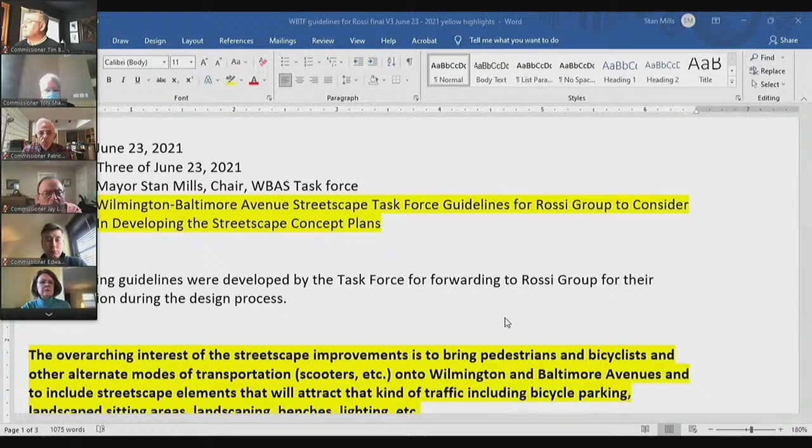That yields 16 members. As I mentioned, one of the overall main objectives of the task force is to provide recommendations. So I wanted to share with you some of this real quick before we hand it over to Rossi. This is a support document embedded into the agenda, so I'm not going to go through it all, but I would like to highlight some of the main things.

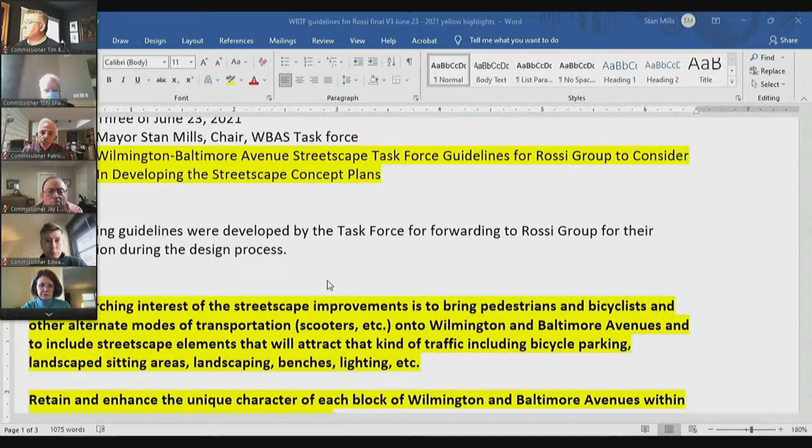These are the guidelines developed by the task force that were then passed on to Rossi to use as their foundation for creating the concept designs. I'd like to read some of the highlights here. The overarching interest of the streetscape improvements is to bring pedestrians, bicyclists, and other alternative modes of transportation, such as scooters, onto Wilmington and Baltimore avenues, and to include streetscape elements that will attract that kind of traffic, including bicycle parking, landscape sitting areas, landscaping, benches, lighting, etc.

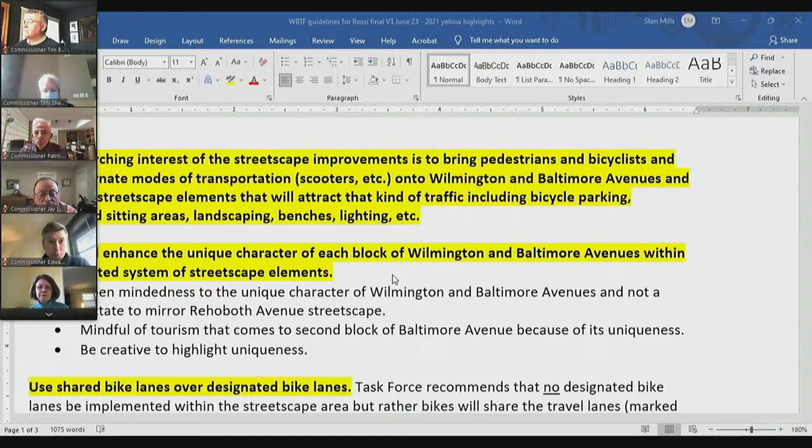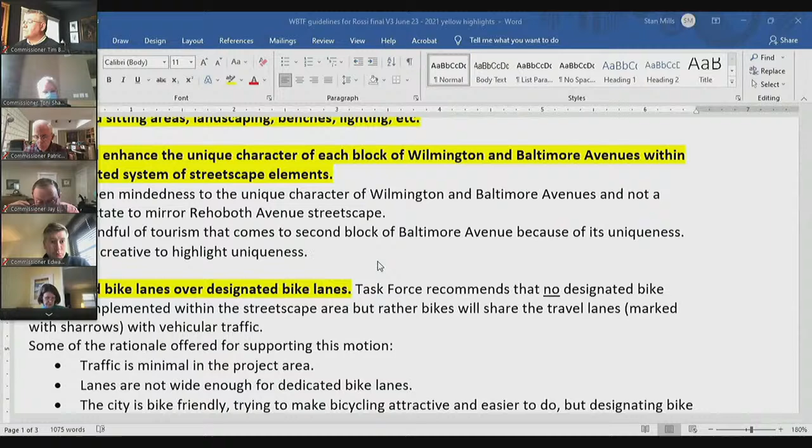As Sharon and I have both mentioned, the amenities come later, so it's going to be absent today, but it is in the guide for the future phase. Some of the other guidelines: retain and enhance the unique character of each block of Wilmington and Baltimore avenues within a coordinated system of streetscape. The task force said that it doesn't have to match the character exactly of the streetscape on Rehoboth Avenue, but there can be some uniqueness there.

Use shared bike lanes over designated bike lanes. Minimum traffic lane width should be established and standardized. We suggested a 10-foot minimum, but 11 or 12 feet are also feasible.

Consider maintaining tapered travel lanes in the first block of Wilmington and Baltimore avenues. For those that aren't aware, if you stand on First Street and look toward the ocean on Wilmington or Baltimore, the street is actually flared, and it is wider at the ocean end than it is at the narrow end. I don't know the real genesis of it, but this is often done to give you a better view down the street and avoid tunnel vision, so to speak.

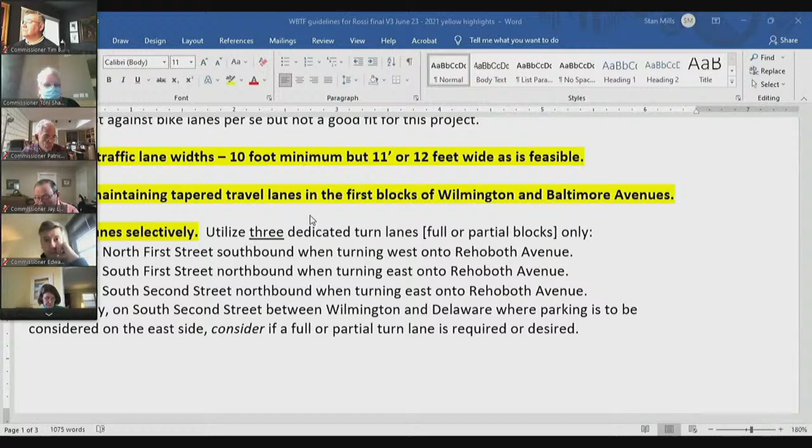There's also a benefit, as probably Mr. Trayos will tell you if he speaks later, that the wider traffic lanes toward the ocean are a benefit for trucks and deliveries. Another guideline: use turn lanes selectively.

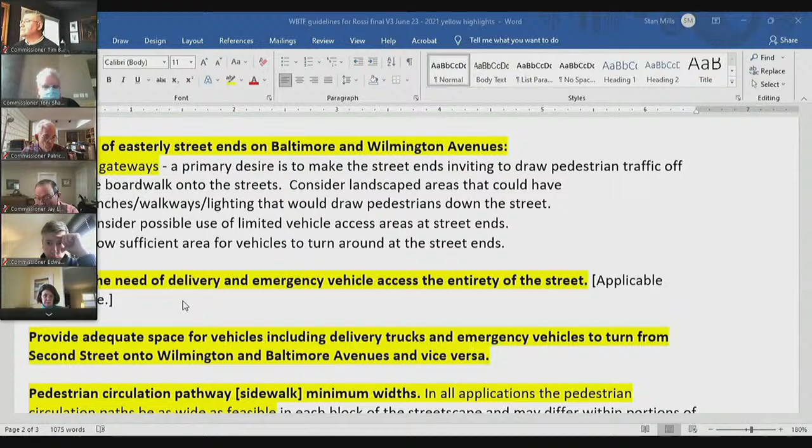More guidelines: treatment of easterly street ends on Baltimore and Wilmington at the boardwalk — treat them as gateways. Consider the need of delivery and emergency vehicle access the entirety of the street. Provide adequate space for vehicles, including delivery trucks and emergency vehicles, to turn from 2nd Street onto Wilmington and Baltimore Avenue and vice versa.

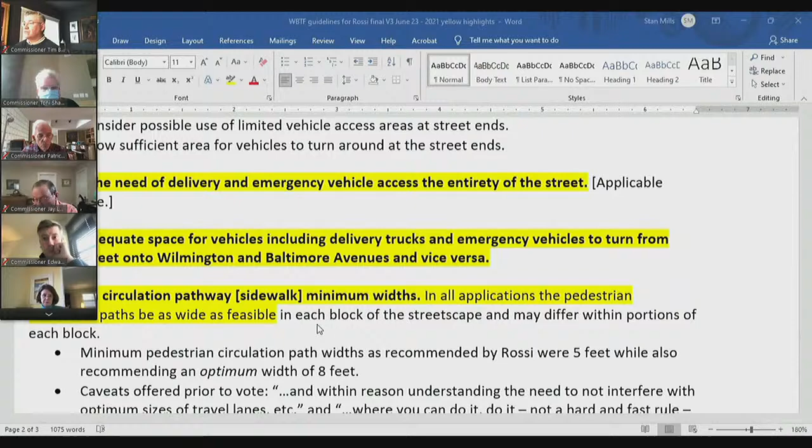Pedestrian circulation pathways, which is a fancy name for sidewalks essentially, should have minimum widths and be standardized if possible. In all applications, the pedestrian circulation path should be as wide as feasible. Parking inventory: number and placement of parking areas is to be determined. Minimum parking space dimensions were recommended and accepted.

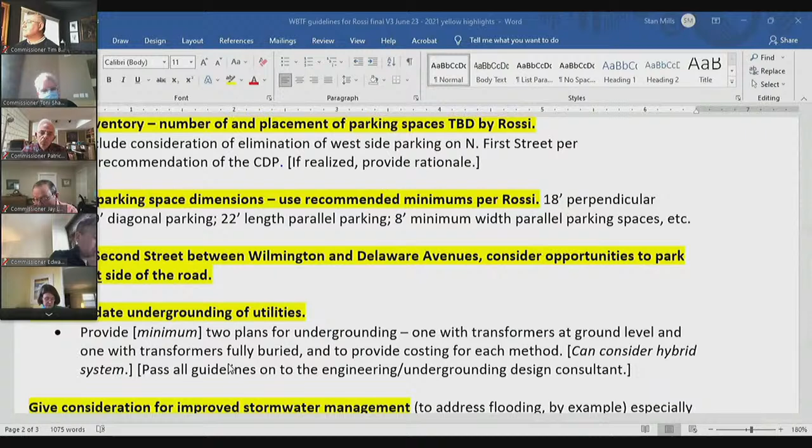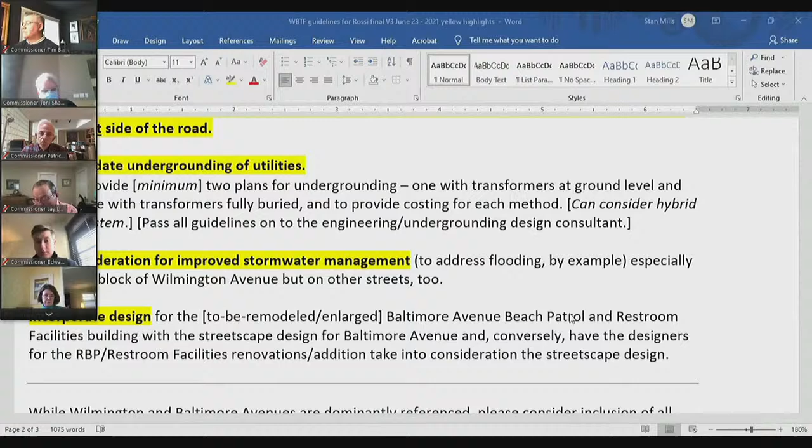On South 2nd Street between Wilmington and Delaware, consider opportunities to park on the east side of the road, adding some spaces. Accommodate undergrounding of utilities. Give consideration for improved stormwater management, which would come at a later phase. And incorporate design for the to-be remodeled or enlarged Baltimore Avenue Beach Patrol and restroom facilities, likely as part of the gateway design.

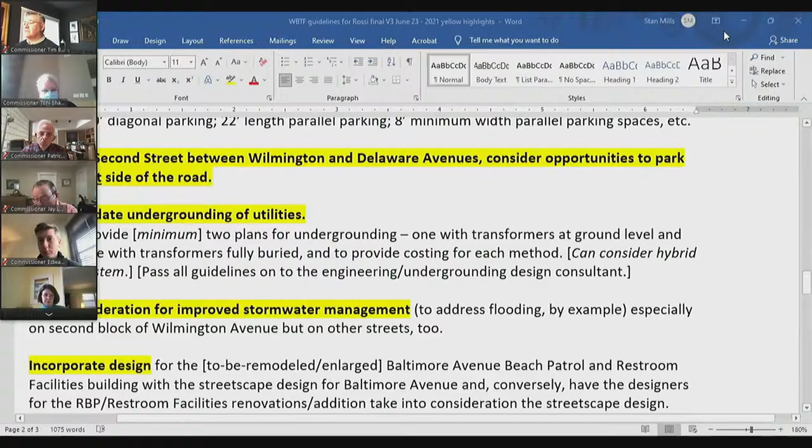So those are some of the guidelines that were passed on to Rossi, and we'll see how well they utilize some of those in their concept plan. From there, I want to turn it over to Rossi. We'll have self-introductions of the Rossi team and turn it over to you all.

Thank you very much, Mr. Mayor. My name is Alexis Morris. I assume you guys are also hearing the feedback that I am?

Or is that gone now? Yeah, we're getting some reverberation. Go ahead, start again and see. Okay, my name is Alexis Morris, I'm with Rossi Group. Are we still getting feedback? A little bit, yes ma'am. We don't know if we can work on it on our end. Our guys will be working on it. I haven't had this issue on my end, but that doesn't mean it's not on my end. We'll give them a moment to work on it. We're not hearing anything yet now. You're not hearing anything now. Okay, thank you very much.

So my name's Alexis Morris. I'm an environmental and transportation planner with Rossi Group. As Sharon mentioned, we are a women-owned business based out of Hunt Valley, Maryland, but we also recently opened an office in Dover, Delaware. We're very excited and happy to be working with the City of Rehoboth Beach and DelDOT on this very exciting and innovative streetscape improvement project in Rehoboth Beach. And with that, I'll go ahead and share my screen.

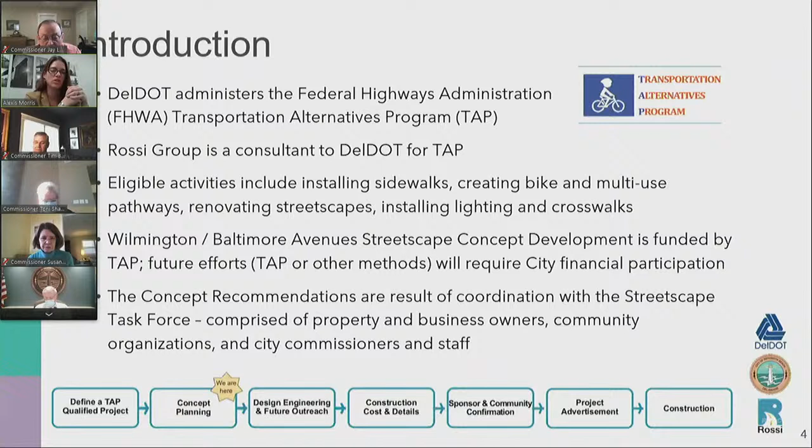The concept recommendations are the result of coordination with the Streetscape Task Force, comprised of property and business owners, community organizations, and city commissioners and staff. The mayor did a fantastic job of emphasizing we really are just at the beginning of our concept development here. So you can kind of see a process flow chart - again, we're in the beginning. Design comes next, and part of that design is the aesthetic treatment, but also some more detailed design studies.

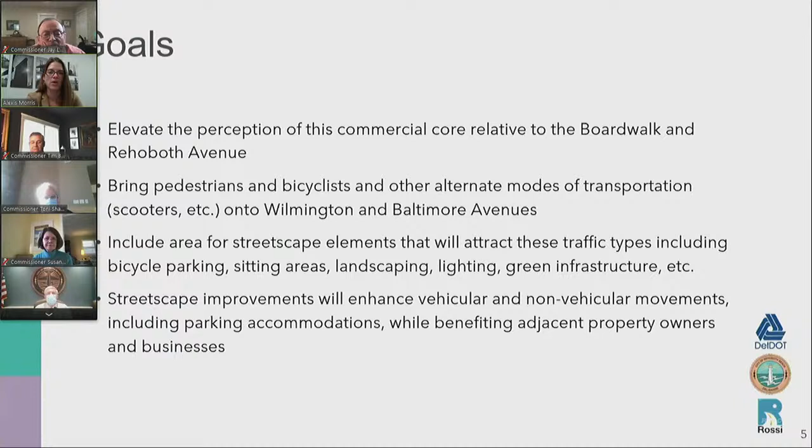So goals of the streetscape concept development were to elevate the perception of the commercial core relative to the boardwalk and Rehoboth Avenue, and make sure we're putting an emphasis on bringing pedestrians and bicycles, as well as other alternate modes of transportation, potentially scooters, mopeds, onto Wilmington and Baltimore Avenues. We also wanted to make sure that we included areas for streetscape elements to attract those traffic types, including amenities such as bicycle parking, seating areas, landscaping, lighting, and green infrastructure. Streetscape improvements would enhance vehicular and non-vehicular movements, including providing parking accommodations while also benefiting adjacent property owners and businesses.

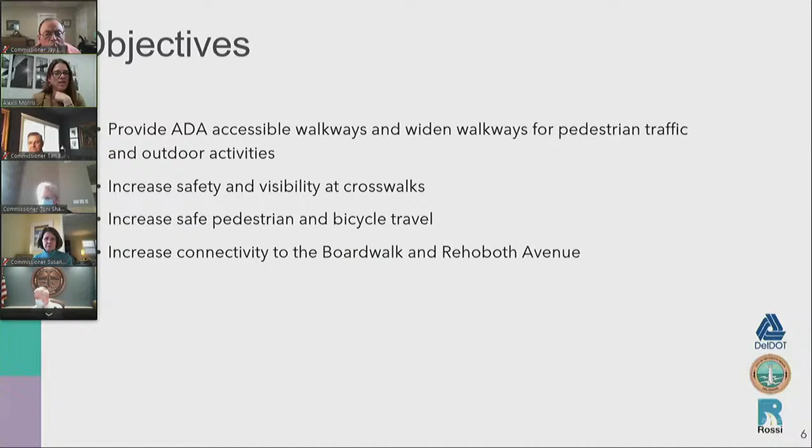The objectives within those goals included providing ADA accessible walkways and widening walkways for pedestrian traffic and outdoor activities, increasing safety and visibility at crosswalks, increasing safe pedestrian and bicycle travel, and increasing connectivity to the boardwalk and Rehoboth Avenue.

The first part of our study was an analysis of existing conditions. We went out, walked the site, took quite a few photos, and made some general observations, including the poor condition of existing sidewalks and crosswalks, and ramps and curbs that needed upgrades. The physical and visual connection between the boardwalk and these streets was limited, and there's certainly room there for enhancement.

In many locations, what we saw was parking dimensions were less than standard. Travel lanes also in some locations were less than standard width. In many areas, the travel lanes, while being less than standard width, are also designated bikeways, so those bikes have to compete with motor vehicles in these very narrow travel lanes. Again, the sidewalks are in poor condition, but there's also a lot of different elements competing for space within the existing sidewalks—a lot of driveways and fire lanes, which restrict parking and sidewalk use, and limited scooter parking throughout the project area. Drainage areas or drainage upgrades are needed throughout.

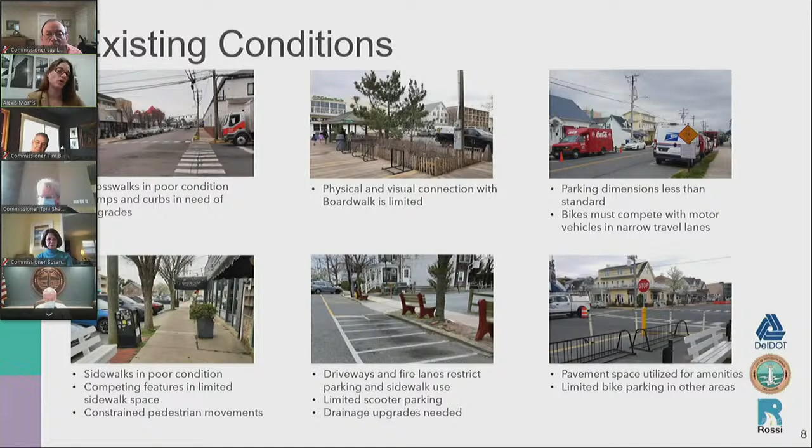We took some rough measurements—obviously not survey measurements, just to get an idea of what we were looking at. The pedestrian circulation path, which the mayor mentioned, is a more detailed explanation for roughly the sidewalk as well as adjacent buffer areas. I'll go into greater detail on what that includes in a moment, but it varied in width—in some locations we were looking at widths less than 5 feet, upwards of 15 plus feet.

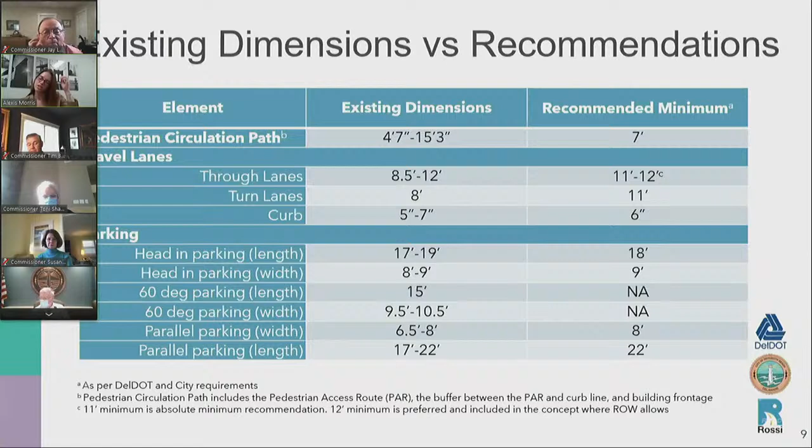Travel lanes also varied. The 8.5 feet and 8-foot turn lanes you see are on First Street—the narrower locations within our study area. But those travel lanes also expanded up to 12 feet and beyond, meaning the flared areas closer to the boardwalk. Again, parking throughout the project area varied. For comparison purposes, we've shown what our recommended minimums are, and I'll go into greater detail about how we got to those recommended minimums in just a moment.

We also looked at related projects and studies within the city, so continued coordination is going to be required based on the status of these studies, where they're at, and any approval or recommendations that may come out of them. Utility undergrounding certainly is being considered, and that team is scheduled to present to the commissioners later this month, but the mayor can talk about that later.

We also have the beach patrol and restroom facilities—that's an ongoing design happening concurrent with this design. The team shared proposed designs with us, but we understand that isn't necessarily approved at this time and may be subject to revision. So when we looked at the beach patrol and restroom facilities, we have a designated area blocked off for design by others, but continued coordination would be required.

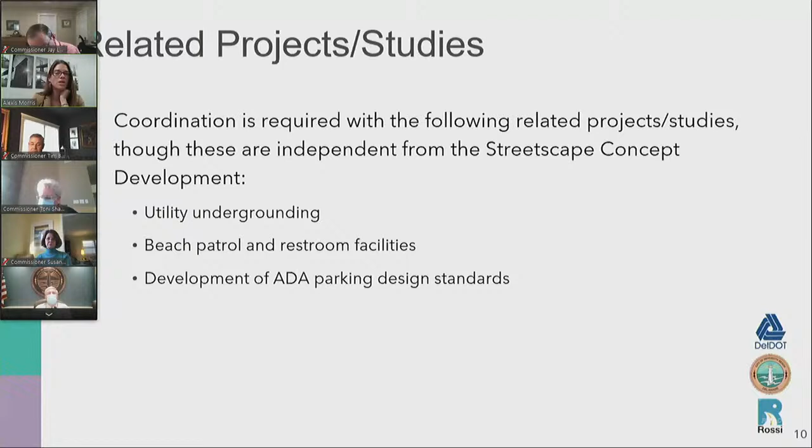Additionally, the city is in the process of developing ADA parking design standards. So while we've outlined parking within the project area, that parking is subject to revision based on what the ADA standards the city depends on turn out to be, and modifications to parking would be required to make sure they're meeting those design standards.

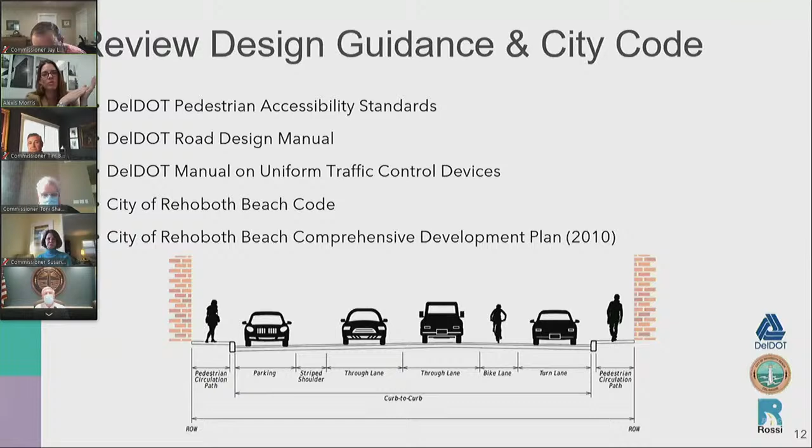Concept development and our recommendations—as I mentioned, we developed recommendations. To do so, we looked at DelDOT's pedestrian accessibility standards, the road design manual, the manual on uniform traffic control devices, the City of Rehoboth Beach Code, and the City of Rehoboth Beach's comprehensive development plan.

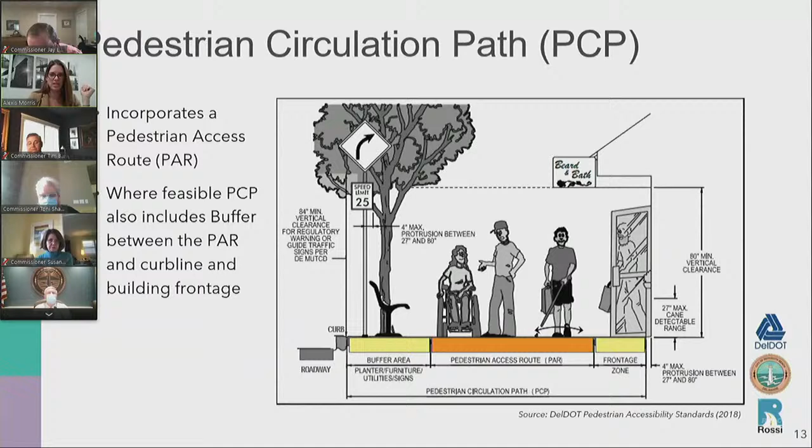The pedestrian circulation path incorporates what's referred to as the pedestrian access route, as well as buffer area. Sometimes these areas are sidewalk, sometimes tree pit planting areas. It also includes the building frontage. But the important element to understand is that the pedestrian access route itself is that clear, unobstructed route located within the pedestrian circulation path.

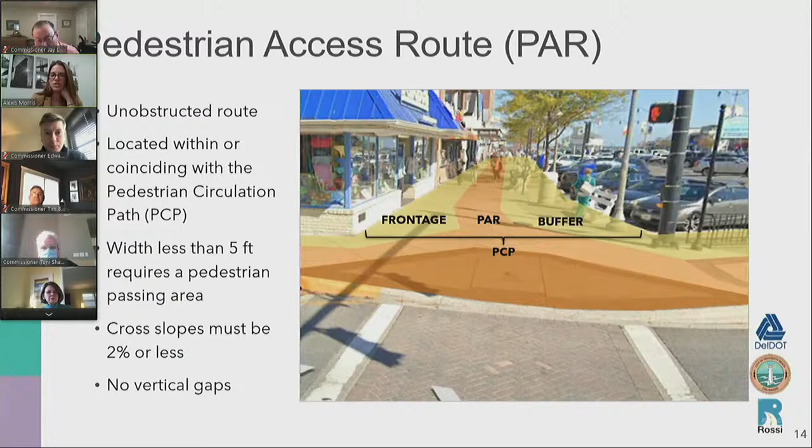To ensure compatibility, we made sure we were looking at the 2012 Rehoboth Beach Bicycle and Pedestrian Plan, which recommended sharrows on 1st and 2nd Streets. This is consistent with the task force recommendations to include shared lanes, and with the 2010 Comprehensive Development Plan, which at a high level focused on assuring connectivity, walkability, safe and unrestricted pedestrian passage on all sidewalks, and streets designed to enable safe access for all users within a citywide integrated network.

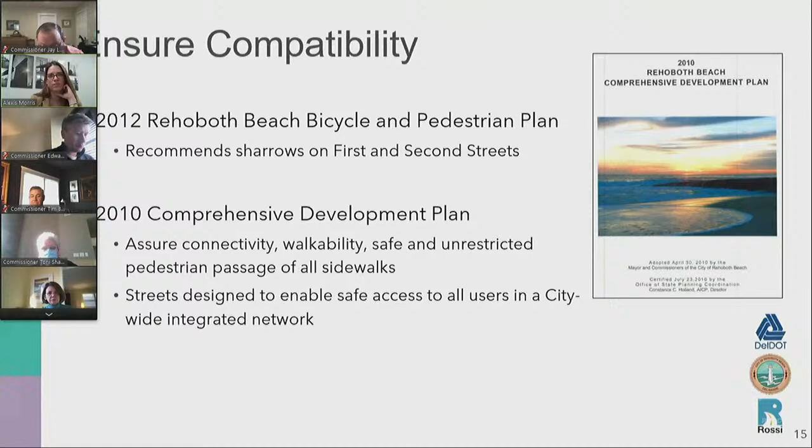Using those various elements, we developed the following recommendations. For the pedestrian circulation path, we recognize there will be areas where it's less than 7 feet, but we strive to maintain a 7-foot minimum throughout. You'll see that in our concept displays, shown in an orange outline, while the broader additional space is colored in yellow.

For travel lanes, we've provided 11 or 12-foot widths throughout. The 11-foot travel lanes are on 1st and 2nd Streets due to constrained right-of-way in those areas. The 12-foot minimum travel lanes are proposed on Wilmington and Baltimore Avenues. We've included a 6-inch curb throughout, and recommended parking be modified to include standardized sizes for head-in and parallel parking. Since neither Baltimore nor Wilmington Avenues are one-way streets, eliminating angled parking would be the more efficient way to utilize that space.

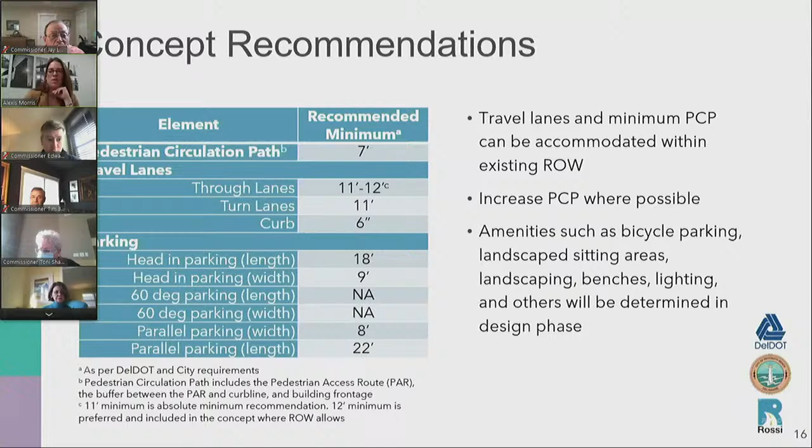Key highlights again within the pedestrian circulation path - you can see in our snapshot the 7-foot pedestrian access route, with the shaded yellow area showing the additional pedestrian circulation path with some amenities shown. These are just drawings or sketches of the concept. Design remains to take place, so where biking or scooter locations are in the future still needs to be designed.

In general, there's no narrowing of the pedestrian access route to less than 5 feet. We enhanced the crosswalks and ramps for safety and ADA compliance. The bump outs you see here help shorten the pedestrian crossing width and increase visibility, while also increasing the pedestrian circulation path and creating additional space for amenities to be determined in the design phase.

One thing we did was consult with emergency services to confirm sizes needed for emergency access vehicles, as well as transit vehicles in the area. Essentially, we modeled a WB40, equivalent to a 40-foot wheelbase small semi truck, for all emergency vehicles and buses we determined are likely to drive along these routes. The turning movements that are allowable today would remain possible in the future.

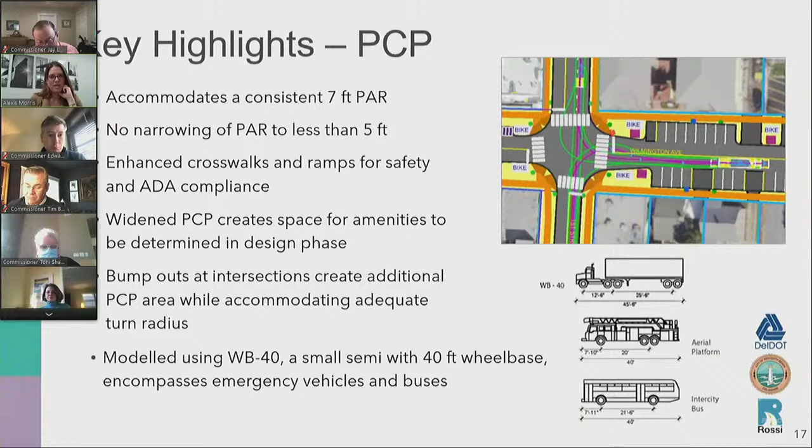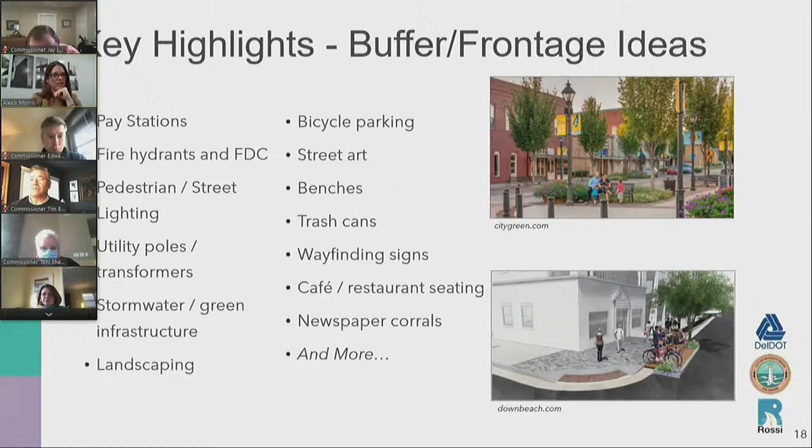Another thing to highlight within the pedestrian circulation path is the buffer and frontage ideas - different things that might be considered as part of that aesthetic treatment, to be determined at a later point in time.

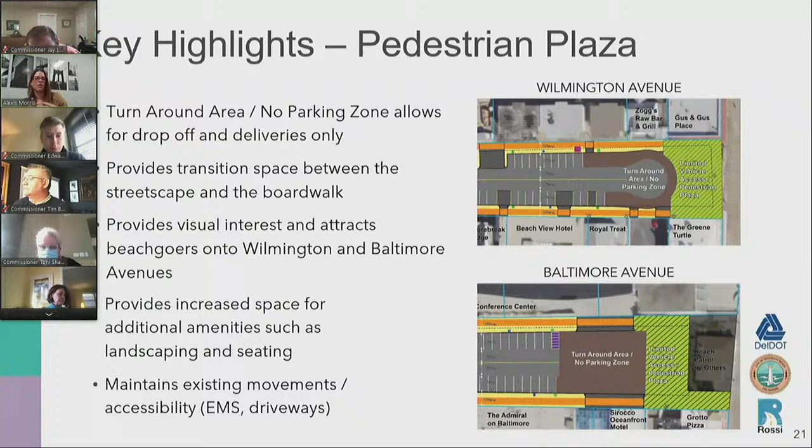These turnaround no parking zones would allow for drop-off and deliveries. Obviously EMS can still access these areas. It provides a nice transition space between the streetscape and the boardwalk, and provides visual interest, attracting beachgoers onto Wilmington and Baltimore Avenues. It provides increased space for additional amenities such as landscaping and seating, while maintaining those existing movements and accessibility for EMS, deliveries, and things of that variety.

Another point for the commissioners' awareness, the larger version of these displays that was shared with the public at our public meeting are still available at the convention center.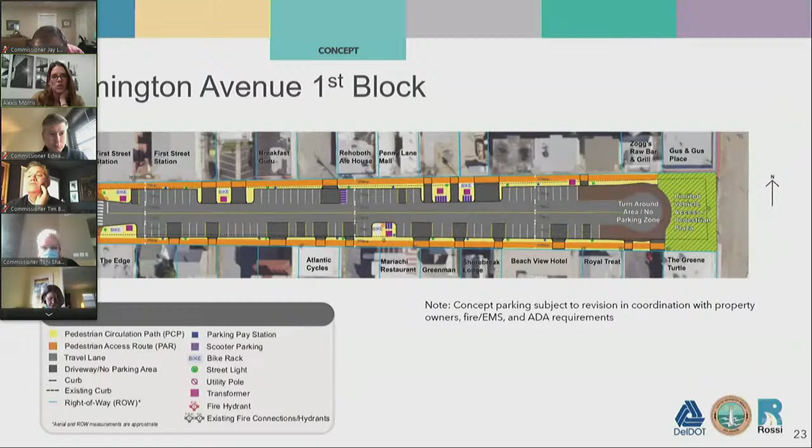So Wilmington Avenue first block, again you can see the limited vehicle access zone here. Baltimore Avenue second block, Baltimore Avenue first block. And touching real quickly, that pedestrian circulation path is the combination of the yellow and the orange pedestrian access route. You can see the travel lanes are defined, the driveways, and no parking areas.

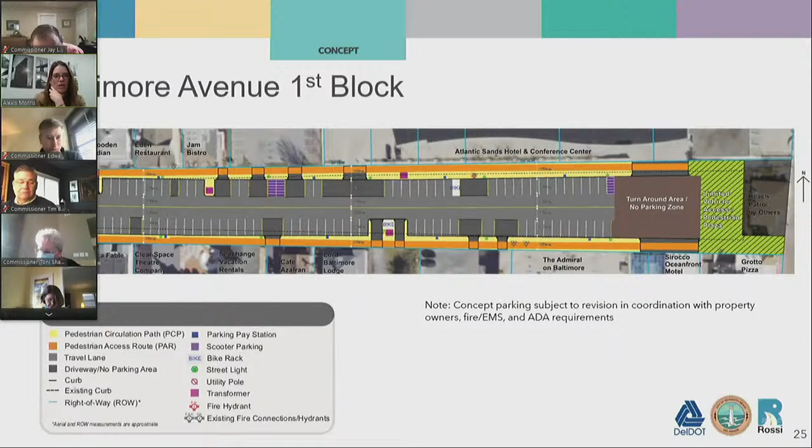We have also demonstrated the existing curb compared to the proposed curb, so you can definitely see that the curb lines would be revised in some areas. Obviously, because we're talking about widening the travel lanes as we get nearer the beach, and still providing as much parking as feasible, there is some modification to existing curb lines where, in fact, they've been taken in. Parking pay stations, scooter parking, etc.

And then North 1st Street, South 1st Street, and South 2nd Street. One point to make is the task force did ask us to look at parking on the east side of South 2nd Street. When we did that and presented that concept to the task force, there was some talk and concern that providing essentially 2 parking spaces in front of roughly what's labeled here as Azzurro Italian oven and bar would be kind of outside of what the existing stretch of roadway is here. Currently there's no parking in this area, so one of the concerns was that that may create additional conflict where currently there is none.

It was the team's recommendation, after seeing that, that we go ahead and remove those 2 spaces. So that's what you see here with this concept, along with the removal of parking in the first blocks of North 1st Street and South 1st Street.

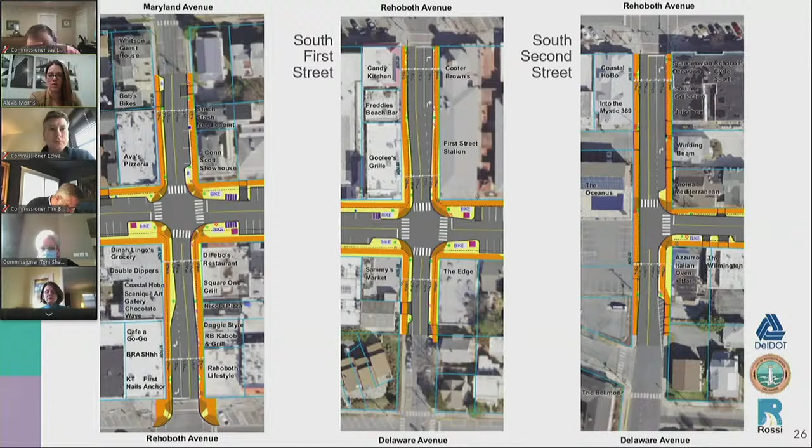So those were the concepts that were presented to the public. We advertised a public open house through the DelDOT and City websites, as well as direct mailings to adjacent property owners and media coverage.

The public meetings were held September 29th between 9 and 12 at the Rehoboth Beach Convention Center. At that meeting, we had 53 attendees sign in, including 7 of the commissioners as well as 7 additional task force members.

Connected to the public workshop, there was a 30-day public comment period open through October 28th, during which time the public was invited to either email or mail comments, or drop them off at the city offices. During that time, 29 comments were received, including one from the City of Rehoboth Beach Trees and Green Infrastructure Committee.

Out of those comments, what we have here is a quick overview. The comments have been provided to the commissioners, it's my understanding. Should you want to look at each individual comment, you're welcome to do so.

Out of the 29 comments received, we received 14 comments specific to the Baltimore Avenue Beach Patrol facility. Again, that's outside of our project scope, but because it's a connected action, people are very interested in it, and those comments are worth sharing with the commissioners. There was also a concern about the loss of vehicular parking.

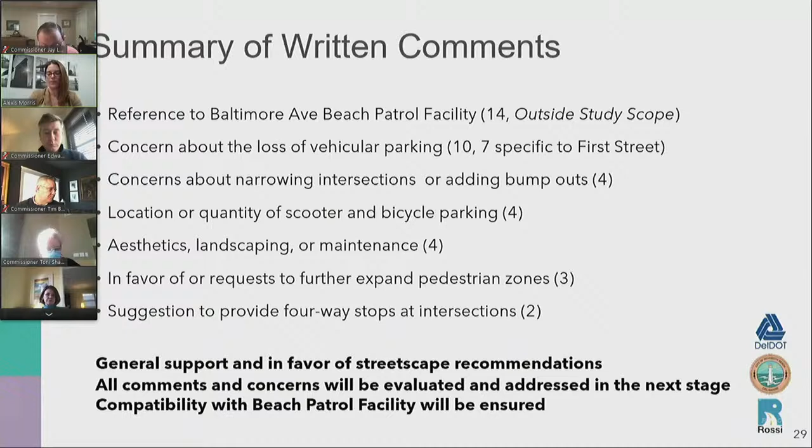So the cost estimate for this design, it's important to know that this is concept level only. It includes major quantities, contingencies, and percentages to account for unknown or unforeseen items. It also includes preliminary engineering. What it does exclude is cost for right-of-way easements or utility undergrounding.

All of the concept as currently laid out would take place within existing right-of-way, so we've not included that right-of-way cost. Any temporary easements or other easements would have to be coordinated at a later date.

We've broken the cost estimate down by segment. One important note is that it's not simply that it costs X amount of dollars to do 50 linear feet of project. It's really specific to the individual location and some of the different factors within that location, whether it's utilities, other resources, parking, things of that variety.

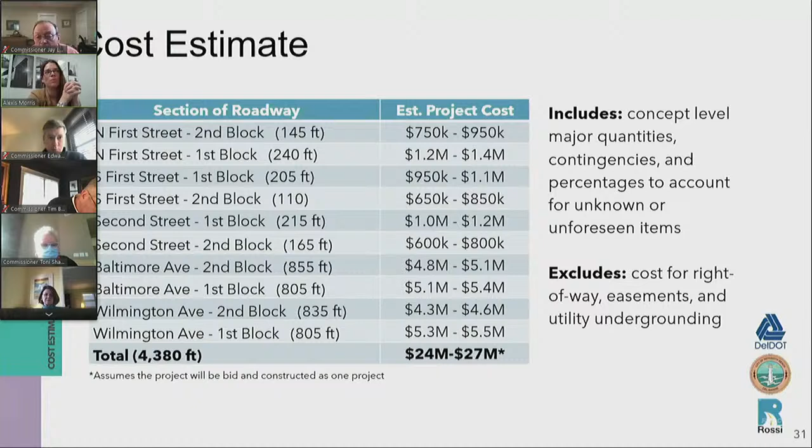So our next steps—I think with that slide, we'll hand it back to the city. And I certainly look forward to hearing any of your questions or comments.

Thank you very much. Go ahead to the next slide if you would. I just wanted to let you know what the next steps are here. I have 2 streetscape meetings, special meetings already scheduled.

One is for a week from today at 2:30. At that meeting, we will receive logistics analysis by JMT engineers related to undergrounding utilities in the study area, including cost estimates. If you recall, that was not in the scope of Rossi to look at undergrounding.

So we hired a specialty engineer, JMT, who has done undergrounding work for Rehoboth Avenue in the city, as well as the main Garfield Parkway in Bethany Beach and otherwise. They've got good experience in that, so they will be at the next meeting.

And then after their introductions, we will engage in introductory commissioner discussions on whether or not to move forward on the design, engineering, funding, and construction, including discussion of hiring a city project manager to assist with project phasing and budgeting.